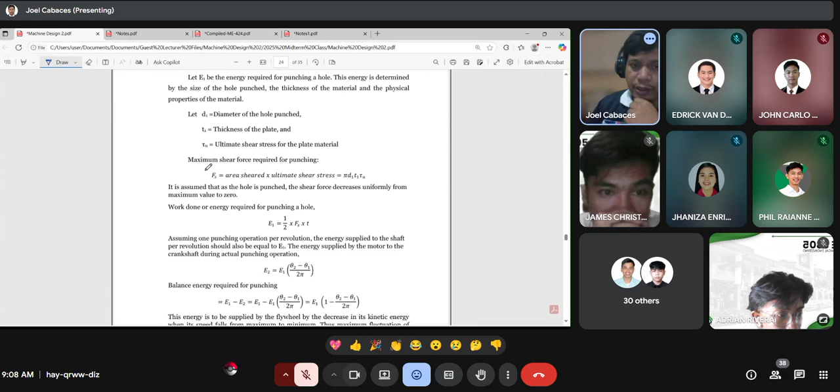Let E be the energy required to punch a hole. The energy is determined by the size of the hole punched, and it will depend on the thickness of the plate. So let D1 be the diameter of the hole punched, T1 the thickness of the plate, and tau u the ultimate shear stress.

So why do you think we're not using tau y? Why not use tau y instead of tau u? Anyone? One student responded: I think tau y is usually used for deformation. I'm not sure if that's correct.

Tau y, yield shear stress, means it will bend. Using ultimate shear stress will lead to creating a hole punch in the plate material. Our intention is to make a hole, not just to bend or deform, so we use tau u instead of tau y. This time we will not be using a factor of safety; we will directly use tau u.

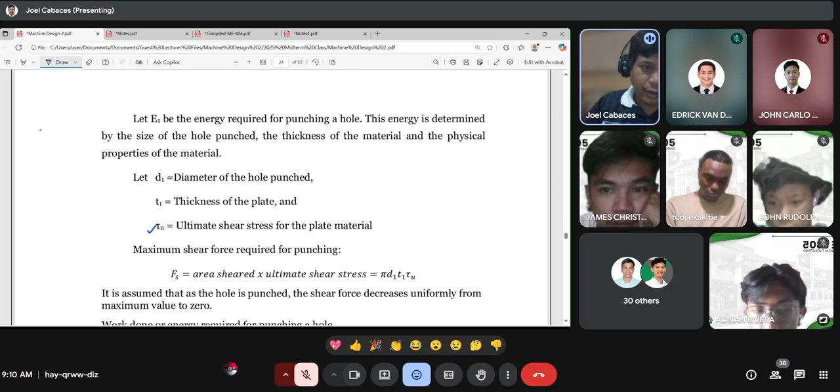The maximum shear force required to punch is the area sheared times the stress. So what is the area sheared? The area being sheared is the area of the hole. For example, this is the hole, so this area - the area means the circumference times the thickness, which is the thickness of the plate. So circumference times thickness is the area.

So this comes from our tau u, since stress equals force over area.

Where the area is the sheared area. So the sheared area is pi d, the diameter of the hole, times the thickness of the plate. Okay. This is the maximum shear force.

Okay. So it is assumed that the hole is punched. The shear force decreases uniformly from the maximum value to 0 during the punching operation. For example, this one: so you have the plate, you have the hole.

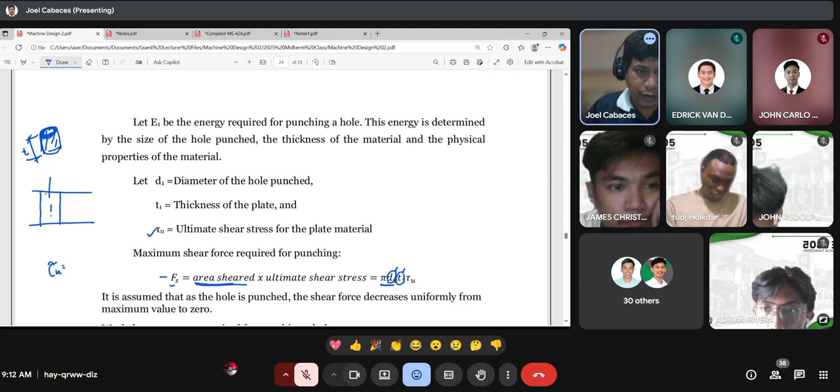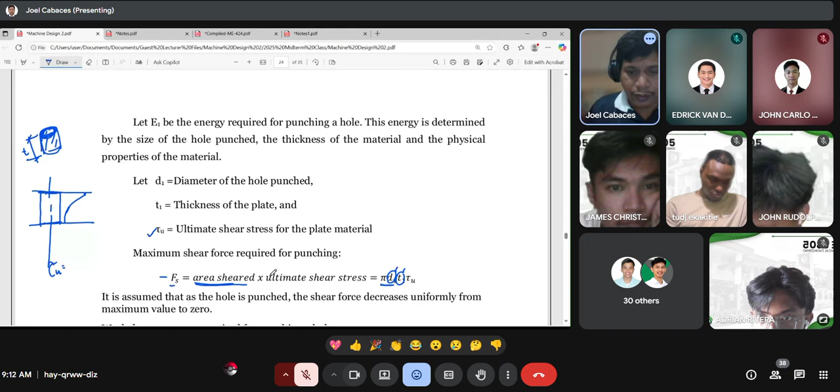During the punching operation, this is the maximum force. Maximum force here during the startup, then decreasing towards the end of punching. So the force decreases. The shear force decreases uniformly. Okay.

So from the formula of work done, E1, again, E1 is the energy required in punching a hole. It will be equal to the force, the shearing force, times the thickness, then divided by 2.

So assuming one punching operation per revolution, every revolution of the crankshaft is only one punch. So the energy supplied to the shaft per revolution should be equal to E1, if per revolution we have only one punching.

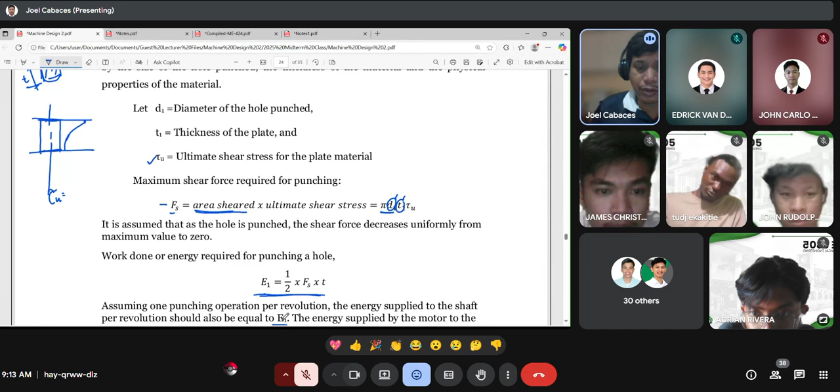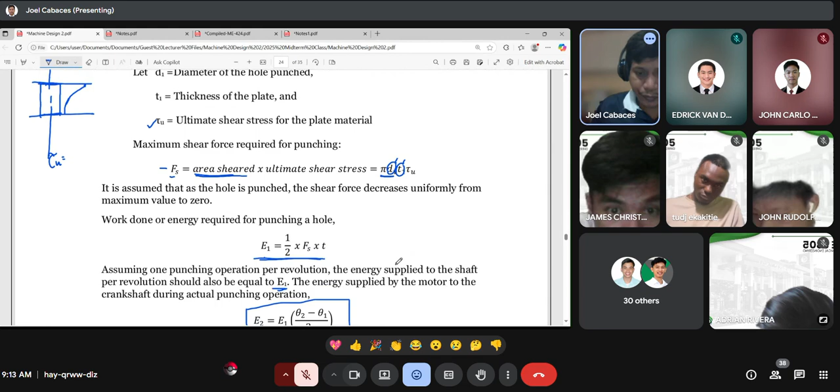So the energy supplied by the motor to the crankshaft during the actual punching is given by this equation. Let's say the energy supplied by the motor is E2. So balancing the energy required in punching, E1 minus E2, where E2 is equal to E1 times theta 2 minus theta 1 over 2 pi.

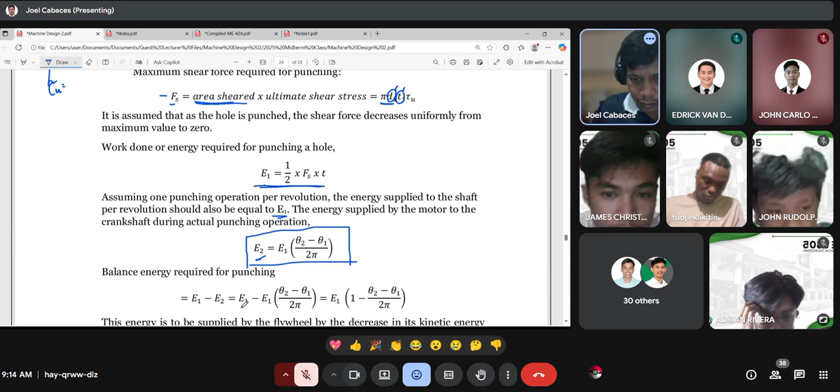This is basically where the punching is, where there is load. 2 pi is 1 revolution, so this is just a fraction. So E1 times this fraction; we factor out the E1, so we have this formula. So therefore the delta E is equal to this. This is the delta E, the maximum fluctuation of energy in punching operation.

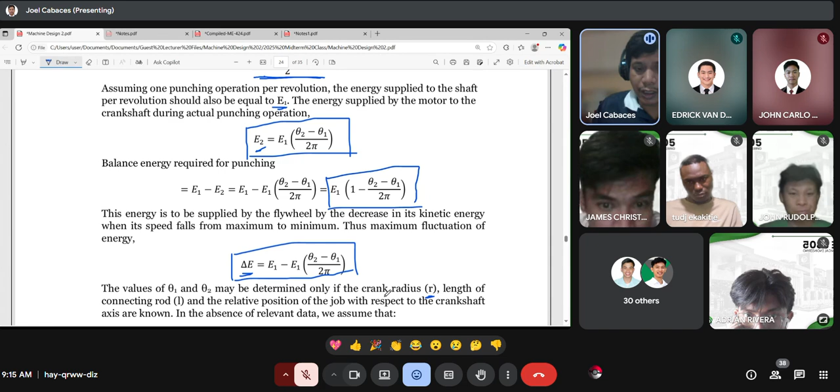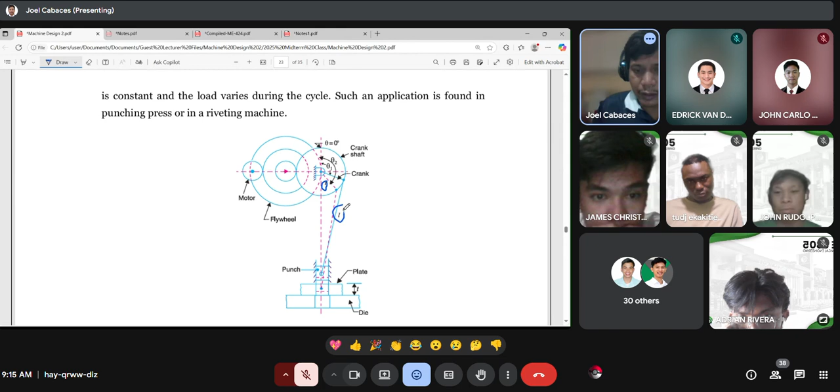The values of theta 1 and theta 2 can only be determined if R, the crank radius, and the connecting rod L are given. So where is our figure, this one. If this is given and this is given, and the distance from here is given, we can get the values of theta 1 and theta 2.

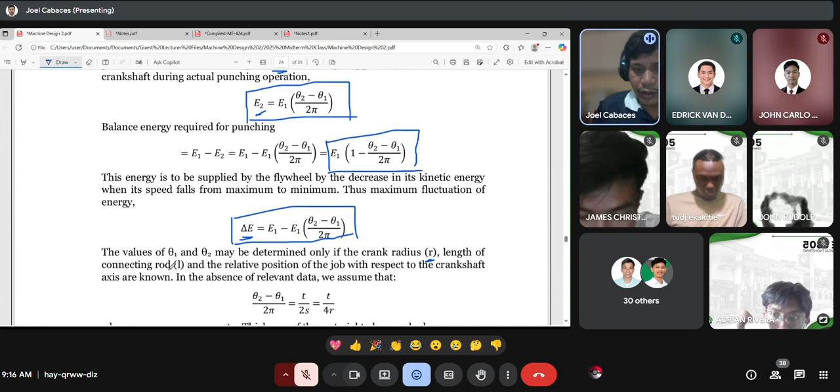But in the absence of this data, if it is not given in the problem, the connecting rod length and the position of the job with respect to the crank axis, and only R is given, we can equate this factor to T over 2S, or T over 4R. Suppose you are only given the crank radius, so T over 4R.

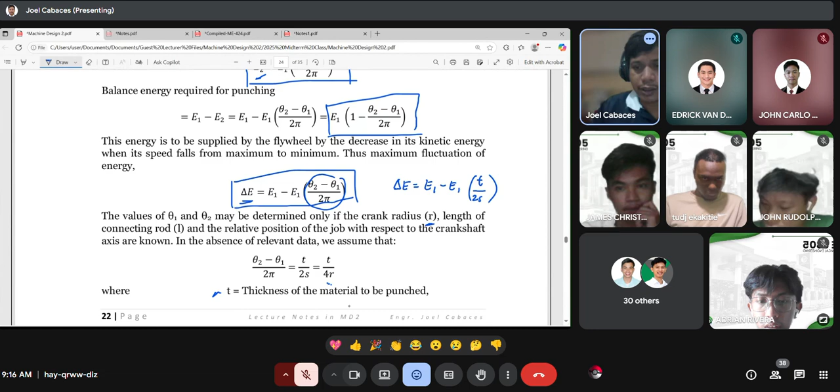So therefore, your delta E will be equal to E1 minus E1 times T over 2S. What is T? T is the thickness of the material to be punched, and S is the stroke of the punch. The stroke is 2 crank radius, 2R, so this will be 4R.

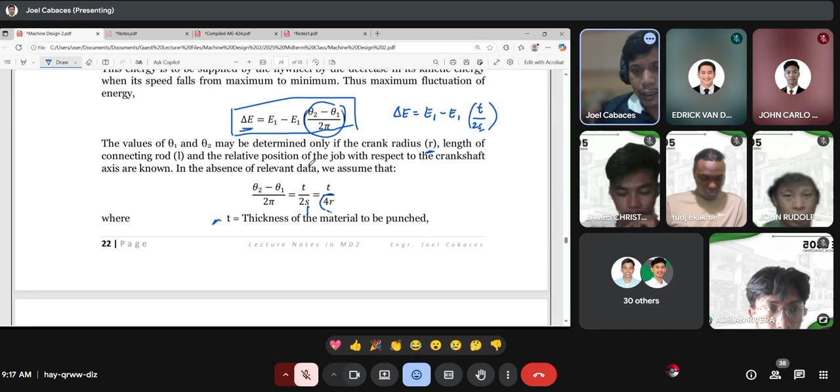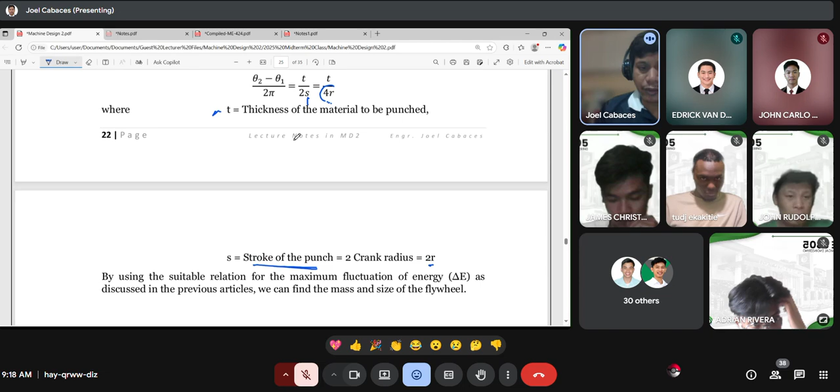So we can use this fraction if we don't have the data, which is R, L, and the distance of the job or the plate from the crank axis. So by using this relationship, we can get the maximum fluctuation of energy. Therefore, we can follow the previous discussion on how to solve for the mass and the size of the flywheel.

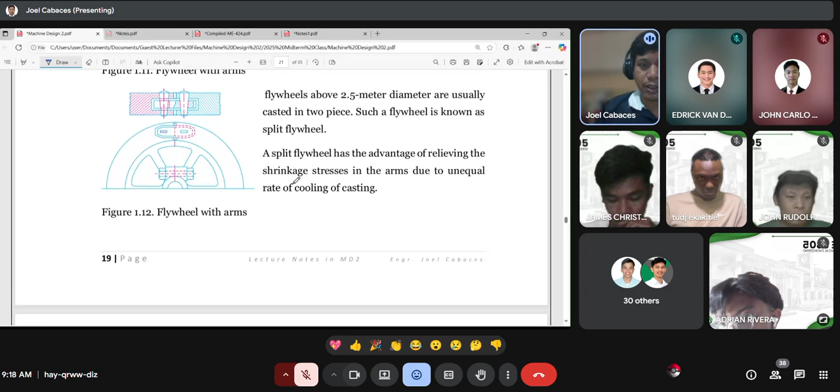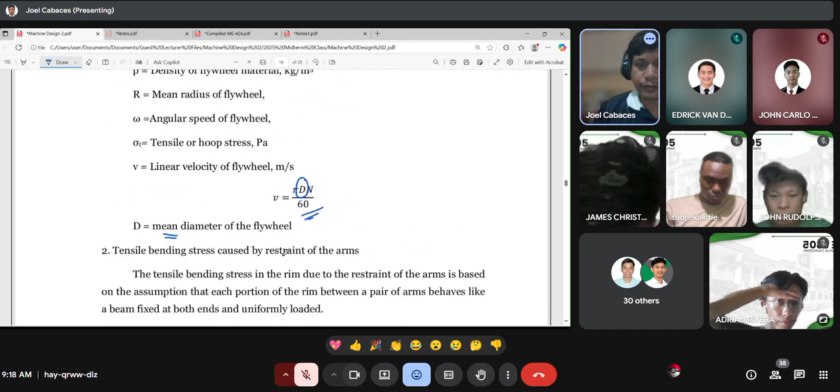So if we know the delta E, we can solve now for the dimensions, the diameter and dimensions. For example, this is for the arm. If we have delta E, we can use the one that we used, this one. So we can solve for the diameters and B and T. Okay. Example problem.

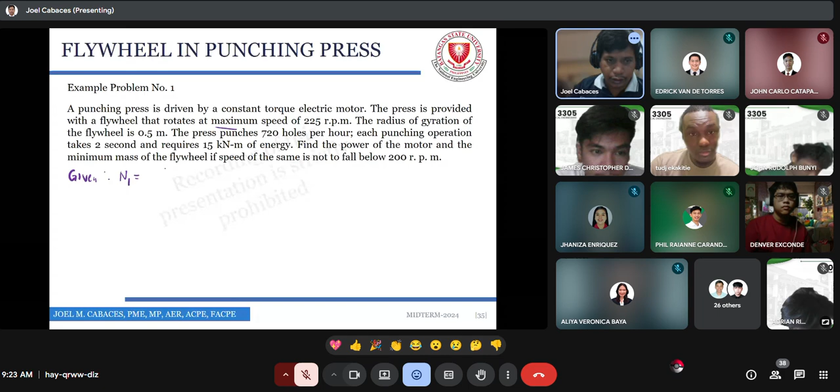okay. So we have N. So maximum, no? So this means this is N1, 225 RPM. Okay. The radius of gyration, which is K, is 0.5. Okay. The press punches 720 holes per hour. Let's say that is small letter n, the number of holes, 720 holes per hour. Okay. So each hole operation takes 2 seconds. So the time is 2 seconds per hole.

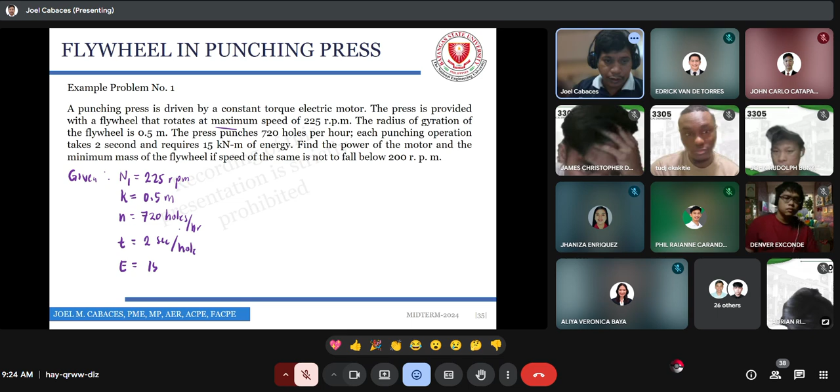Okay. And this requires an energy of 15 kilonewton meter. Okay. This is also per hole. Okay. So what is required is letter A, we need the power, and letter B, we need the mass. Okay. So solving for power. Okay.

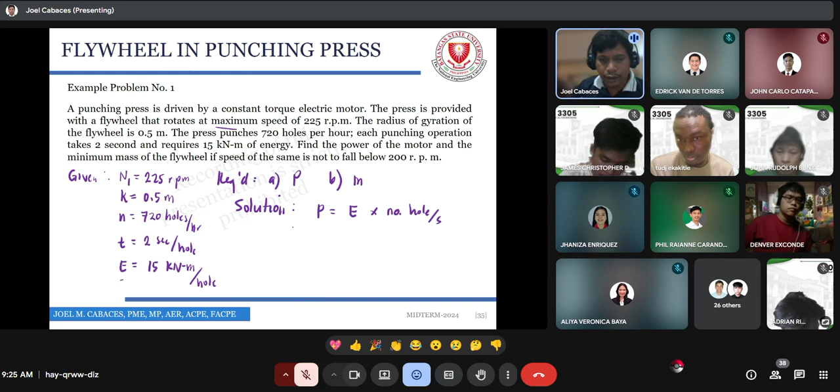So the power equals the energy required per hole times the number of holes, per second. But our given is per hour, no? So energy is 15 times 10 to the 3 Newton meter per hole. And the number of holes, 720 holes.

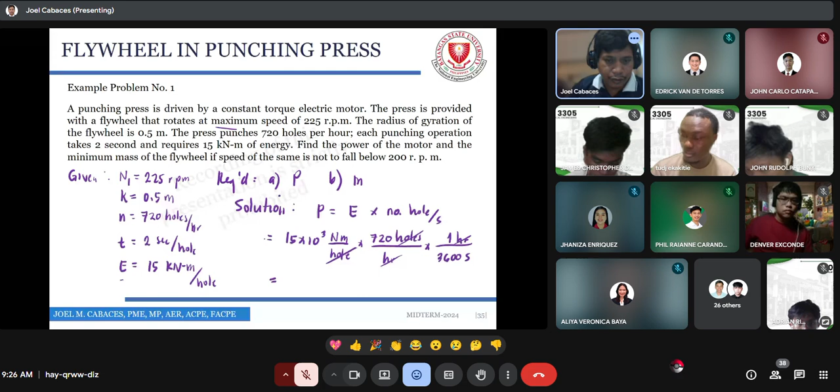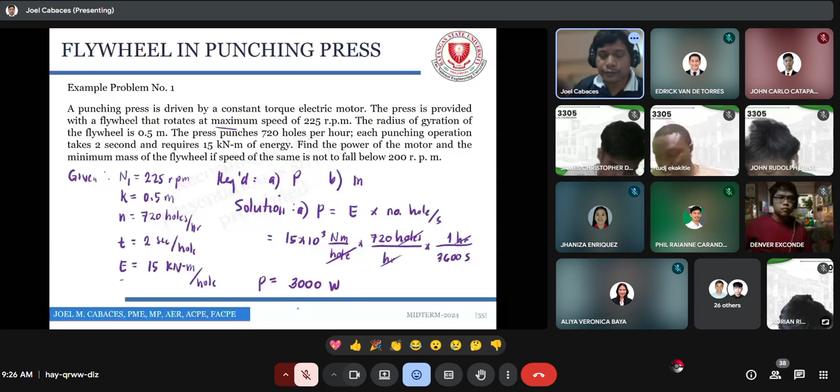Okay. Per hour, no? So just divide by 3,600 in here, so that will be in seconds. Okay. So holes, hour, Newton meter, second. So we'll have here 3,000 watts. So this is the power. This is for letter A. Okay. So letter B. We require the minimum mass of the flywheel.

Okay. So since we require the minimum mass, we can use the equation that we derived previously, which is delta E equals pi squared over 900 m k squared N (N1 minus N2). You can use other equations for delta E, no? Okay, just to get the mass. So let's say this is the equation that I will be using. The mass is required.

K, we have the K. So N, we can calculate since N1 and N2 are given. So N is equal to N1 plus N2 over 2, 225 plus 200 over 2, so 212.5 RPM. So we have the N1 and N2. What we don't have is the delta E. So what is delta E again? Delta E is the maximum energy minus the minimum energy, or let's say E1 minus E2. Okay?

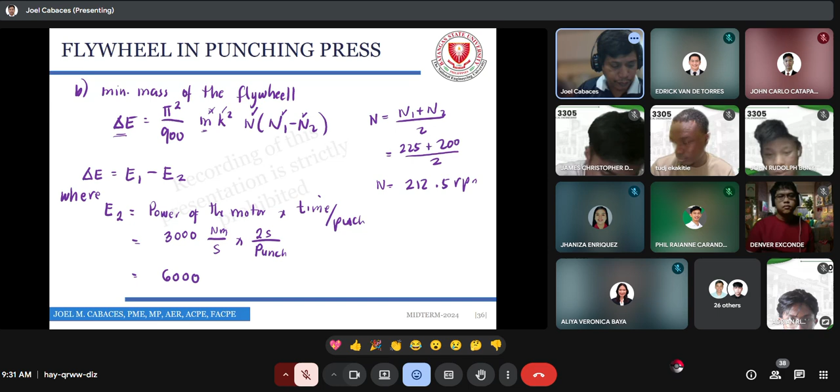Okay, so power of the motor is 3,000 Newton meter per second times 2 seconds per punch. So therefore we have 6,000 Newton meter per punch, or per hole. It's the same, no? One punch is one hole. Okay.

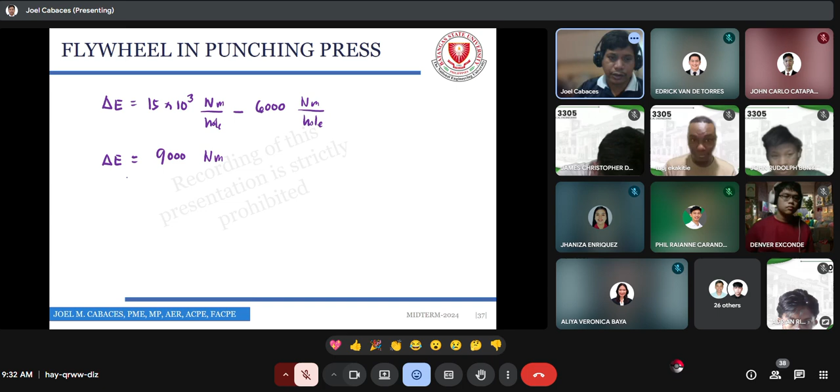So solving for delta E, 15 times 10 cube Newton meter per hole minus E2, which is 6,000 Newton meter per hole. It should be the same unit. So this is around 9,000 Newton meter. That will be the delta E. So we can get now the mass. Just substitute the values, so we get a mass of around 618 kilogram.

Okay, so using this mass, just in case you were asked to solve for the dimension, you can also solve for the diameter of the rim, just converting the mean speed to linear velocity, using velocity equals pi D N. Okay. So since this is the only requirement in this problem, we'll stop here. Okay. Questions?

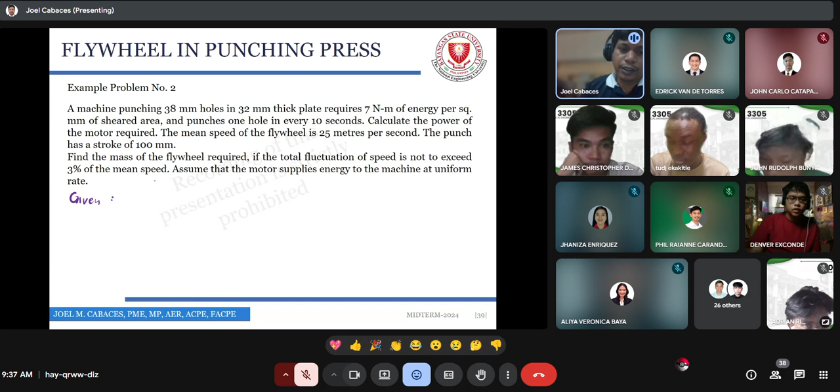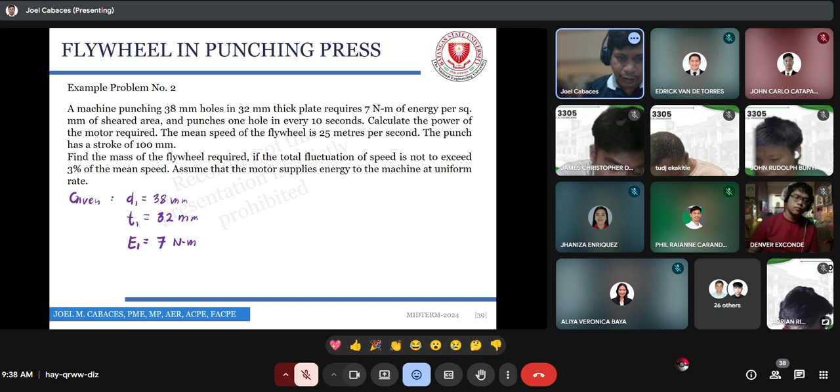So what is 38 here? 38 is the diameter of the hole. Okay, and 32 is the thickness, 32. Okay. We have the energy, 7 Newton meter per, take note, per square mm of the sheared area.

Okay. We have also the mean speed. So meters per second siya, so linear velocity, 25 meters per second. So the punch has a stroke. So which one is the stroke? The stroke of the punch, from top to bottom, until the end of the punch. The punch has a stroke of 100 mm.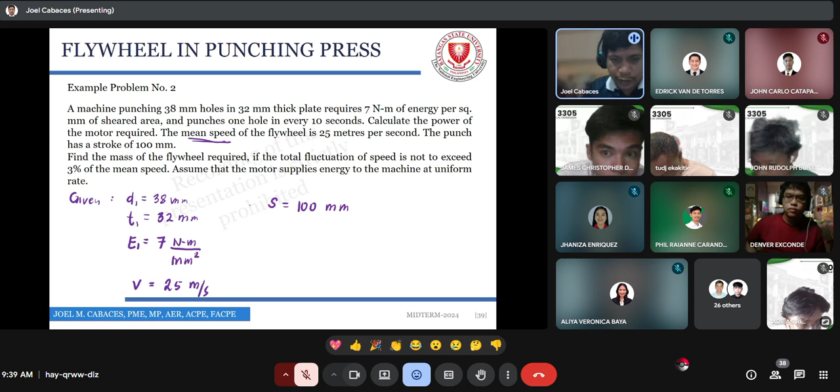And we have here the total fluctuation of speed. What is the total fluctuation of speed? Total fluctuation of speed, CS, or V1 minus V2 is equal to 3% of the mean speed. Okay. So ang required is A, power, and B, the mass of the flywheel. Calculate the power and the mass of the flywheel.

So power, the solution. Solving for power is equal to energy, E1, over time during punching. So what is E1? E1 as given is 7 Newton meter per mm squared of the sheared area. So that is not yet the value that we have to put here. So we need to get the sheared area.

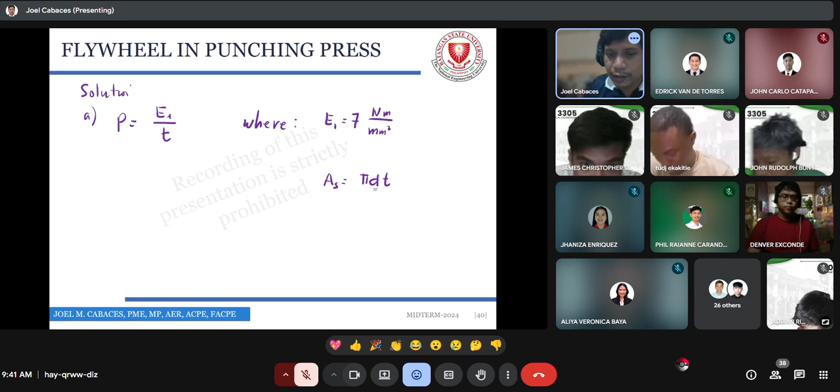So sheared area is pi d times the thickness of the plate. D is the diameter of the hole. Pi d means the circumference. Circumference times the thickness. So pi times 38 times 32. So this is around 3,820 mm squared. So you will just multiply 7 by 3,820 mm squared to get the value of E1 in Newton meter. So E1 is 26,740 Newton meter. Okay.

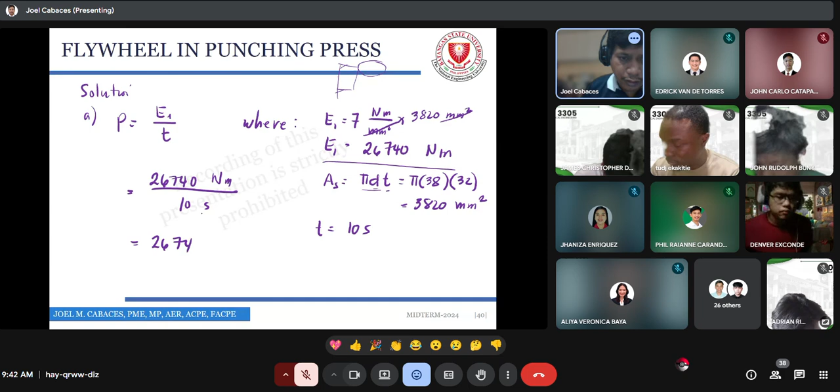So where T is 10 seconds, 10 seconds in punching a hole. So E, 26,740 Newton meter per 10 seconds. This is around 2,674 watts. Okay, solving for the mass.

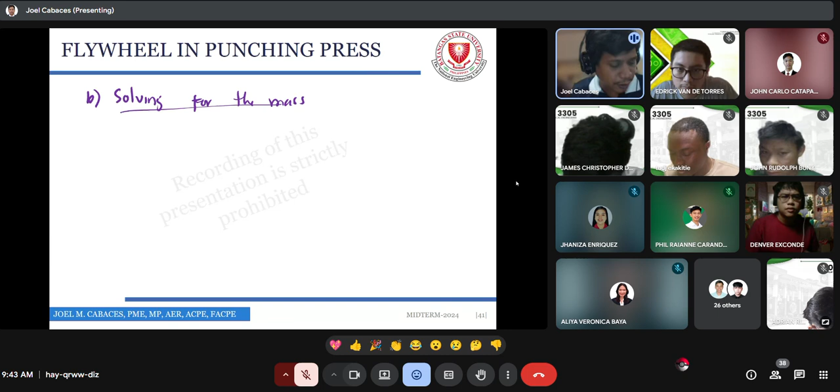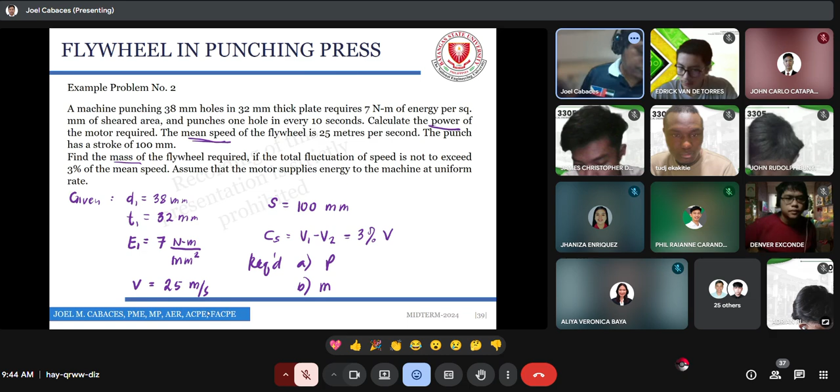So what formula are we going to use in solving for the mass? Anyone? John Carlo? Catapang? Absent? Pwede po ba sir ang delta E po? O delta E? Anong delta E? So with the available given, alin yung pwede natin gamitin? So we can use delta E.

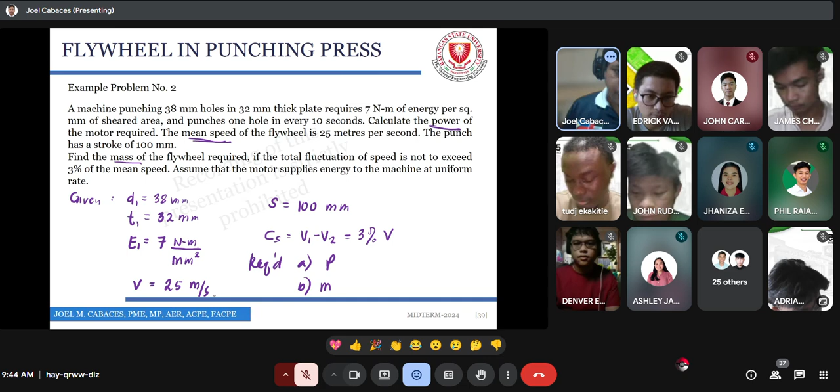Ashley? Delta E equals m v squared CS po. m v squared CS. Okay. So we're looking for the mass. Velocity is given, no? Given yung velocity. Given ba? Yan, given ang velocity. So we have also CS. Huh? Okay.

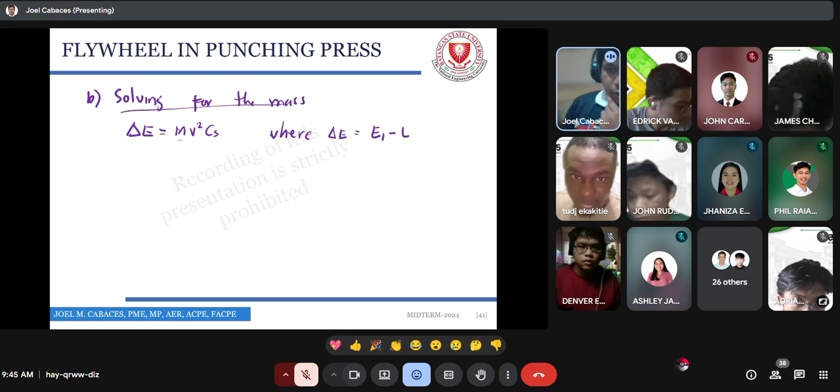So delta E, what is delta E? Delta E is equal to E1, the energy required to punch a hole, minus E2. So we have E1, we already solved E1 here, 26,740, the energy required to punch a hole. And we have to solve for E2. E2, if you will remember, is equal to E1 times theta 2 minus theta 1 over 2 pi. Okay? So we have to analyze.

Do we have the value of crank radius? Do we have the length of the connecting rod? Do we have the distance of the punch from the center of the crankshaft? Okay, if you can see here, do we have this length? Do we have this R? And do we have this distance? No, we don't have this.

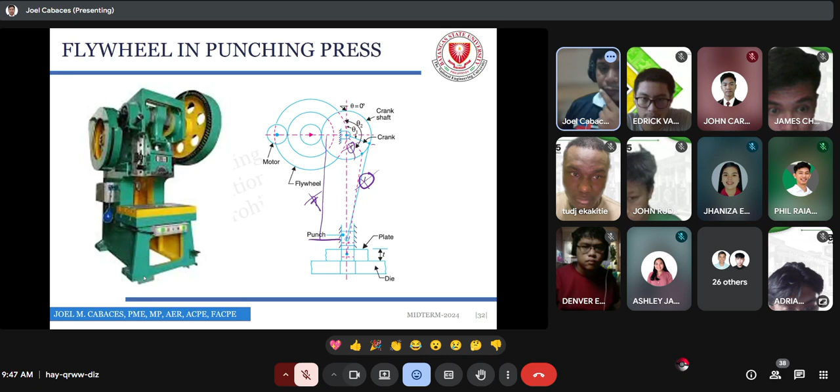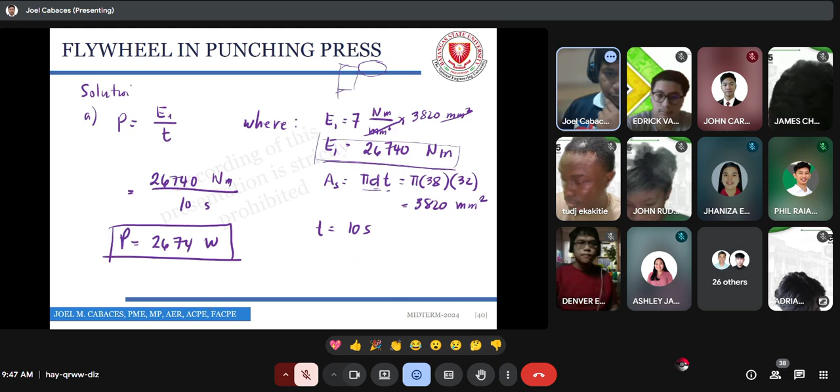So therefore, we can use this formula: E2 = E1·t over 2S. So since the S or the stroke is given, we can use this one. So 26,740 times the thickness of 32, over 2 times 100, the stroke. Stroke is 100. Okay.

And regarding the CS, CS is 0.03. So from the formula of CS, V1 minus V2 over V, where V1 minus V2 is 0.03 of V, so therefore CS is 0.03. So what I wrote here is wrong. This is not equal to CS. This is the maximum fluctuation of speed, not the coefficient of fluctuation of speed. This is the total fluctuation of speed, not CS.

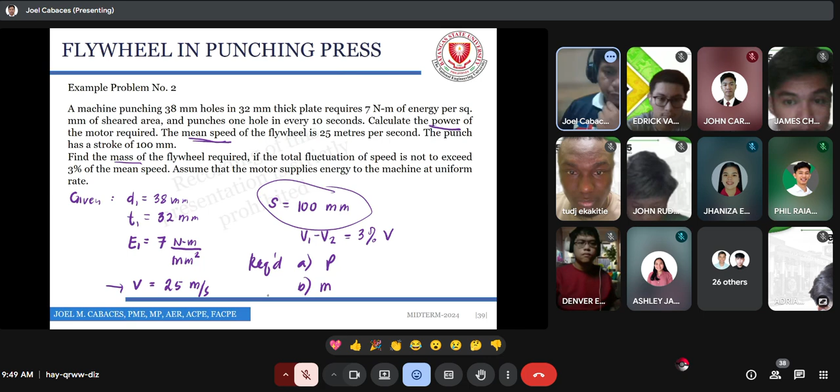Okay, so we can now have our mass. Let's solve the mass here. So around 4278.4. Hopefully you have the same answer. Newton meter. Anyway, let's continue. So the mass is equal to delta E over V squared CS.

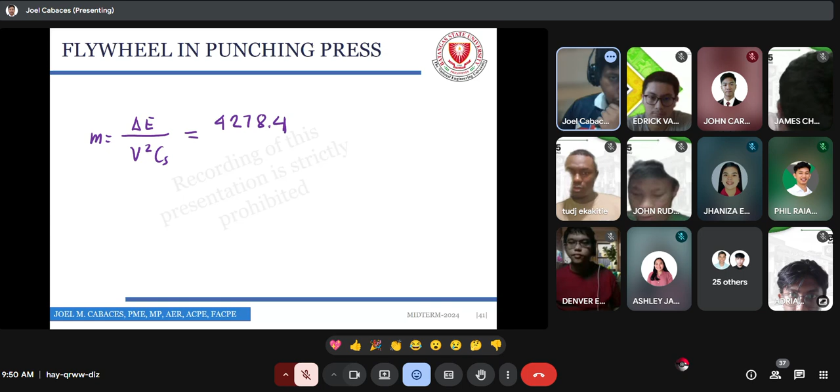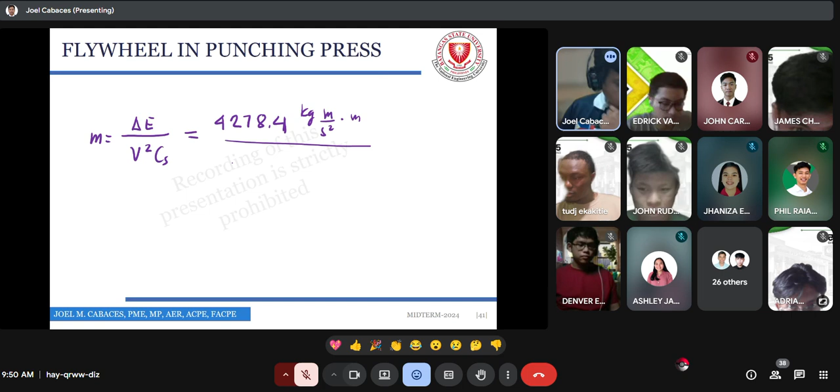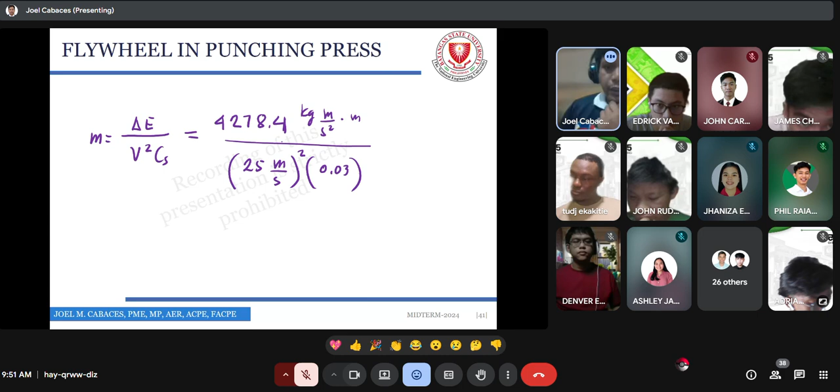So we already solved the delta E. Delta E is 4278.4. So kilogram meter per second squared times meter, this is Newton meter. Then V squared, 25 meters per second squared, and this is 0.03. So cancel the S.

Sir, the 4278 is E2, not delta E. Yes, correct. It got erased, so we still need to get delta E. 22,461.64. Yes, correct. Thank you. So delta E is E1 minus E2. So this is 22,461.6 kilogram meter per second squared meter. So what is left is kilogram.

So what is the answer here? 1198.0074. Okay. Any questions? Part of my solution got erased, so one part is missing. Hopefully you get it.

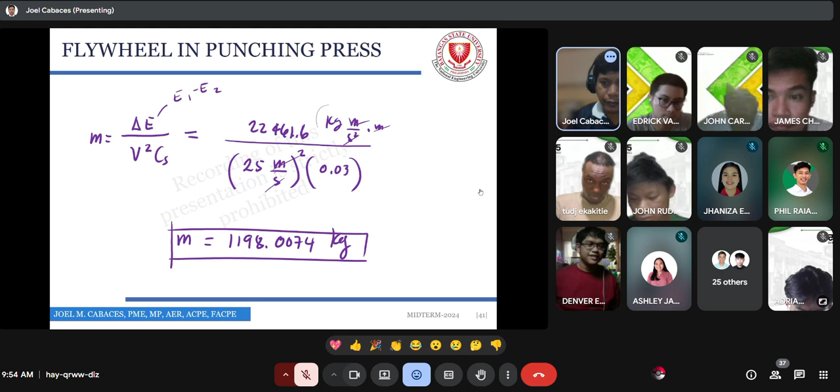Okay. So short bond paper, write problem given, required, and solution. If it is required to make the turning moment diagram, you can use graphing paper so that it will be easy for you. Handwritten, submit the soft copy in Google Classroom. I will be putting your grade there. And keep the hard copy with you.

I may ask you to submit it at the end of this course or before the finals. This is just to confirm whether what you submitted is the same as your hard copy. Your grade will be in the Google Classroom, and if it is found different, the grade will be changed. Submit on time; late submissions will not be accepted. Also, you don't need to provide a front page. No front page. No name.

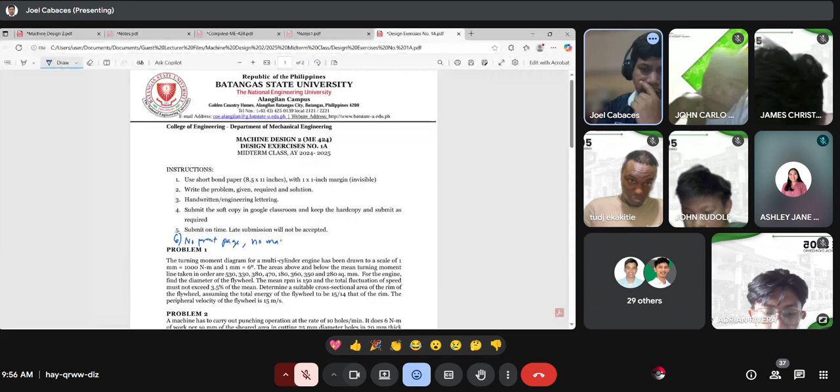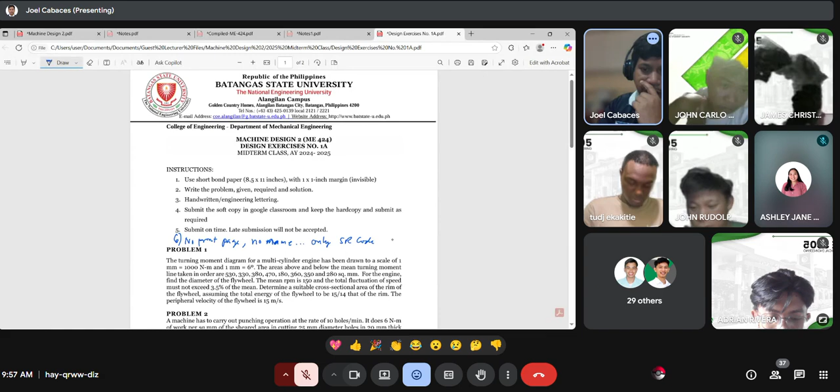Okay. Only SR code. Okay, and section. Only SR code and section on the top. No need to provide a front page. No need to put your name. Only SR code and section, so that when I check, I will not see the name, so I will not be biased in giving grades.

Maybe some of you I know. So that's why, so there will be no bias. So with the SR code, I will give the grade. I will base my grade on your submission. Okay, understand? Clear?

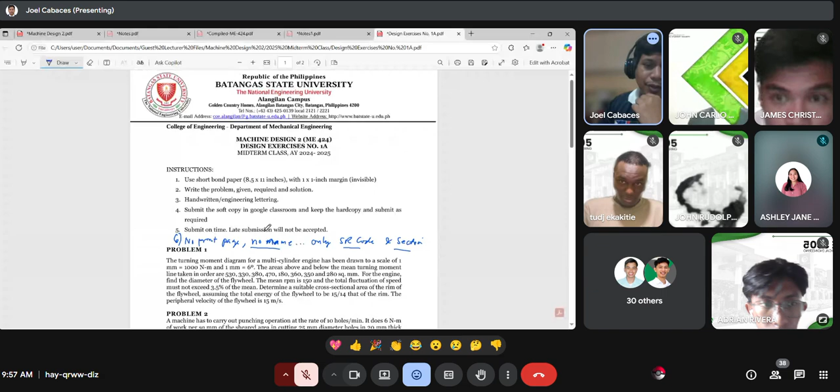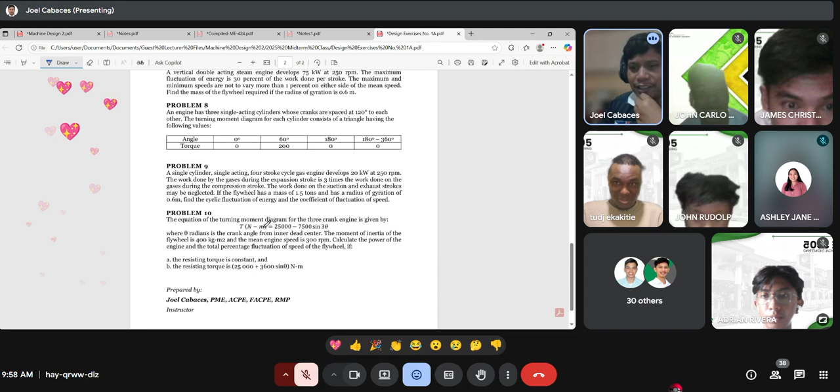So I have here a few problems. Tell me if this is not enough, I will add more. Don't worry, I will not ask you to submit tomorrow. I will not ask you to submit Sunday, Monday. I will put the submission on Tuesday, before 7. Okay? Question?

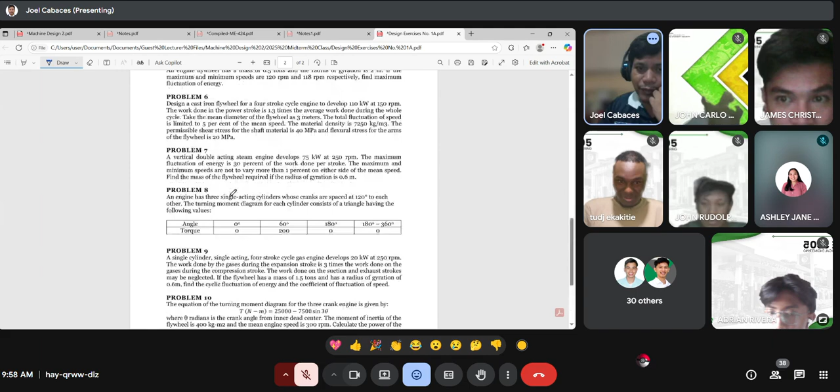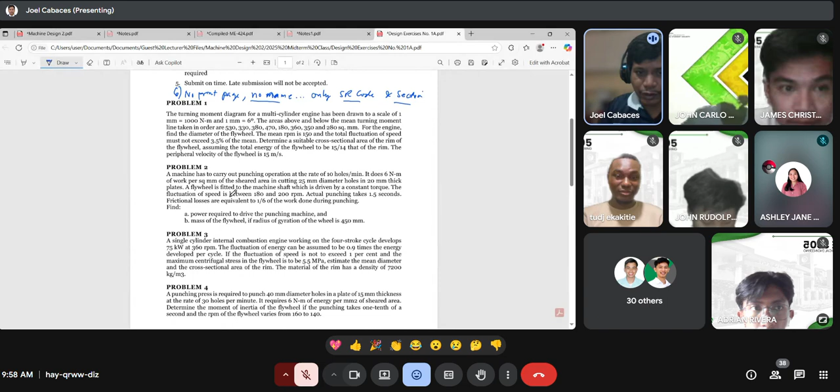So for those who want to start, you can screenshot this one. 1, 2, 3. Yes, Jan, I will put this one in the Google Classroom. I will just ask you if you want to start. Jan? Sa conversion po, sa final answer po ba ay ilang decimal places?

Okay, so we are working with the design. So if your answer is non-dimension, for example, mass, make it 4 decimal places. But if your final answer is diameter, width, thickness, meaning dimensions, you have to standardize it. So for mm, you can make it a whole number.

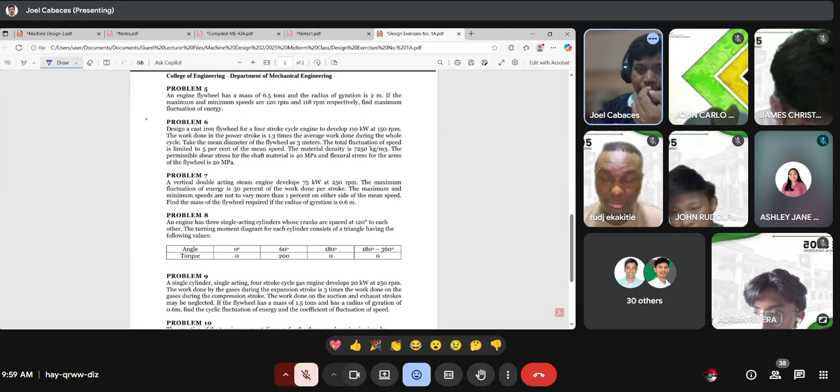So for example, earlier we solved for b. We came up with 42 something mm. I just put 42. You can make it 43, no issue. 43, 44. Just make it a whole number, the higher whole number, for metric. But if it is in inches or English units, make it a fraction.

So let's say you have an answer of 0.4256 inches. You can say 1/2. Or, for example, 0.675 inches, you can put 3/4. The highest denominator here is only up to 32. Up to 32. I don't want to see over 64.

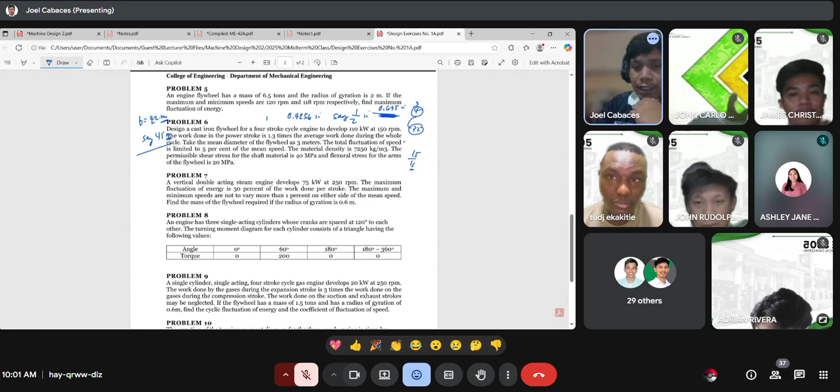So that means 31 over 32, or 15 over 16, that's also okay, as long as it's higher than the calculated value. For the dimension only. Again, you will standardize only the dimension. Okay, clear? Thank you, sir. Another question?

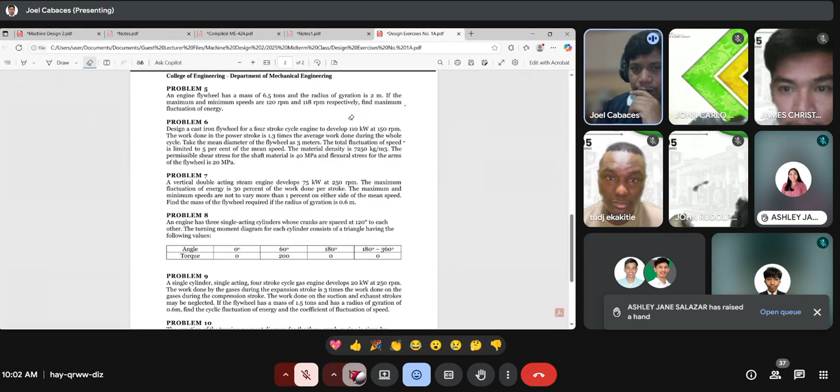So take note, this is 30% of your final grade, the design exercises. So of course, this is 1A. There is 1B, 1C, and 1D. Ashley. Yes, Miss Ashley, you're recognized.

Hello po. Sir, kung all caps daw po ba yung sa design works? It's up to you. Thank you po.

Jay, you have a question? Yes, sir. Are you going to send us a soft copy of the manual so we can get the reference formulas? Not the soft copy. But I will be providing you the hard copy, the book-bound manual. Because that is not mine, actually. I will just borrow the manual from my colleague. Okay?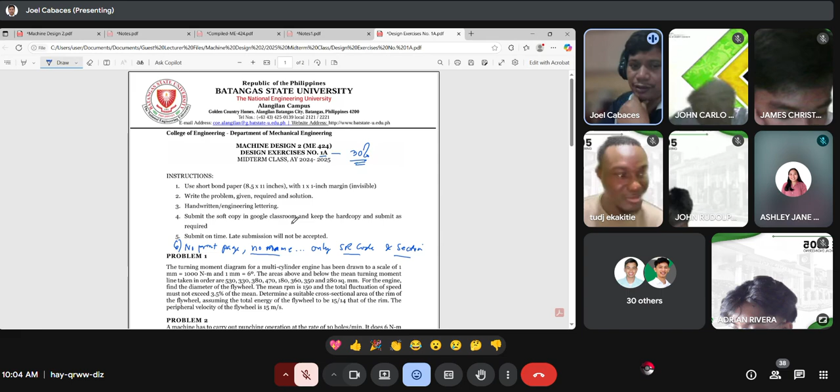The only reason why I asked is because if I want to start solving today, I may need it. I think it will be better as a hard copy. If it is a soft copy, it will just stay in your drive. You will not open it for sure. With a hard copy, you can put notes there. You can write the problems, the sample problems, the solutions. So you will just be bringing one bound notes. Okay.

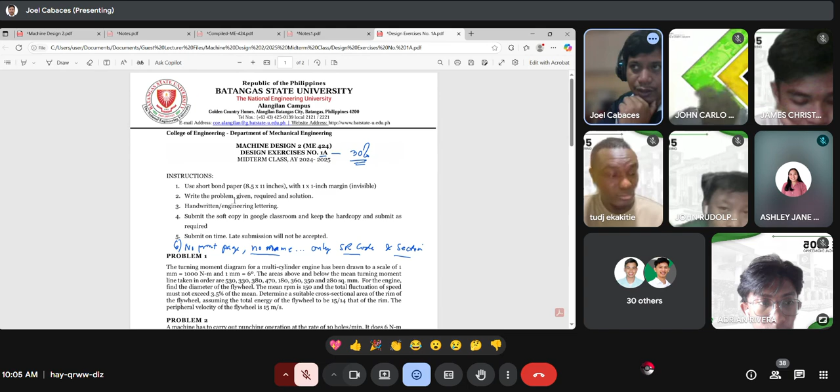Any more questions? Okay, since there are no questions, I will upload this to our Google Classroom, and you can start doing this.

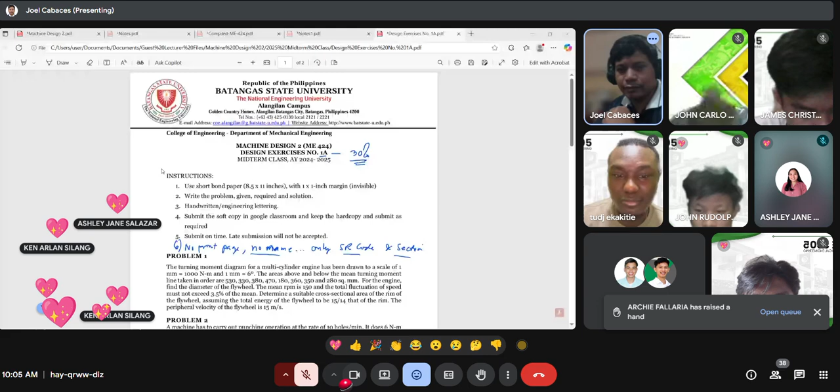Yes, Archie. Sir, magkano po ang ipiprepare po namin for the module?